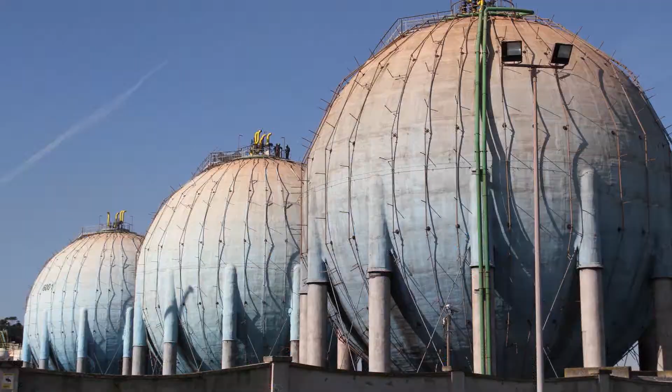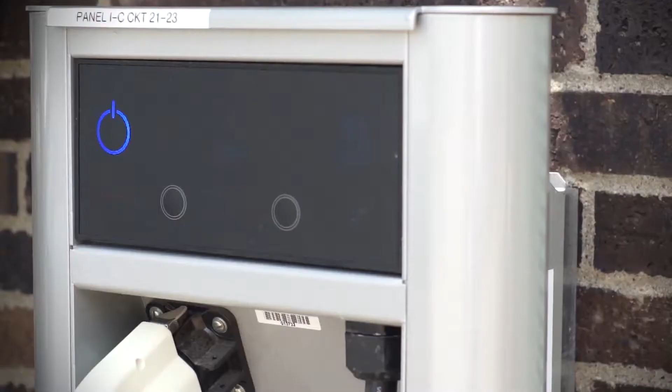It is also possible to use what the U.S. Department of Energy refers to as renewable energy sources, including solar, wind, hydroelectric, and geothermal power to generate the electricity required by EVs as these energy sources become more widely available.

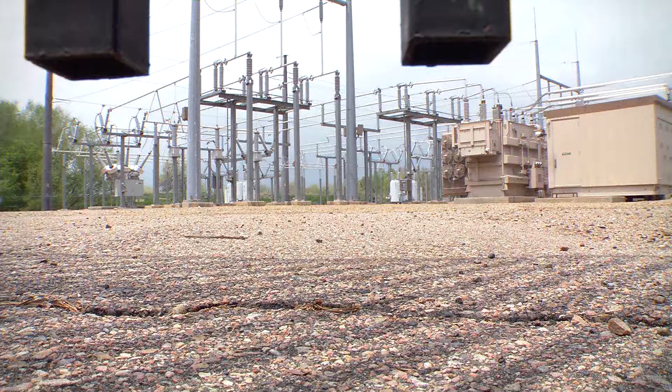Electric drive refers to vehicles that use electricity to either power or improve the efficiency of a vehicle. According to the Alternative Fuels Data Center, the electricity used to power the vehicle may be provided by the electric power grid and is stored in the vehicle's batteries. However, onboard generation of electricity is common in EVs.

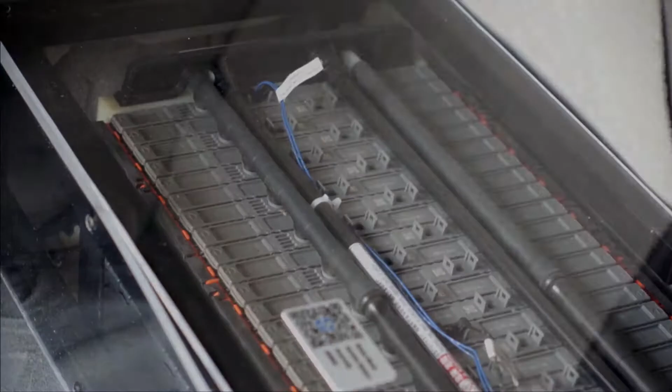Electric drive vehicles can be sorted into three categories: hybrid electric vehicles, also known as HEVs, plug-in hybrid electric vehicles, known as PHEVs, and all-electric or battery electric vehicles, also known as BEVs. An additional, less common group includes hydrogen fuel cell electric vehicles, also known as FCEVs.

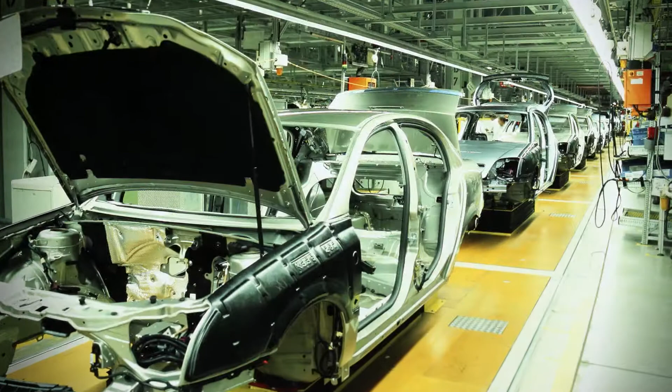All of these use electricity, energy storage devices, and electric motors to improve efficiency or completely power the vehicle. There are various configurations based on these standard categories. For example, General Motors refers to the Chevrolet Volt as an extended range electric vehicle, or EREV, which would be a variant of a PHEV.

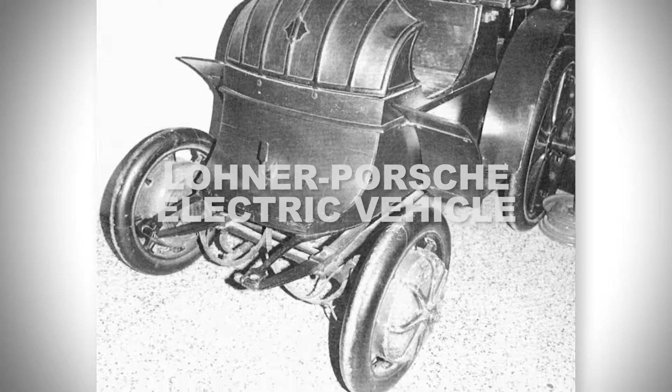Electricity as a fuel has been around for over 100 years. Some of the first electric vehicles were battery-powered versions of a horseless carriage. As petroleum production increased and fuel prices dropped at the beginning of the 20th century, electric vehicles faded away as conventional petroleum-fueled vehicles became popular.

However, with increasing fuel prices and growing environmental concerns, electric drive vehicles are again gaining popularity.

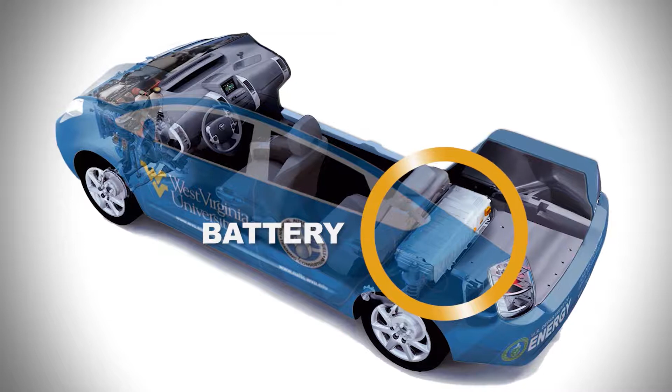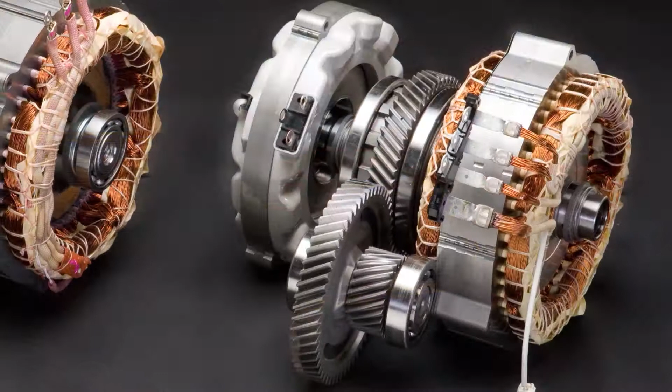The most common method to store electricity is in batteries. The most popular forms of batteries are nickel metal hydride batteries and lithium-ion or polymer batteries. The stored electricity is used to power electric motors. These motors are capable of producing large amounts of torque across a wide speed range.

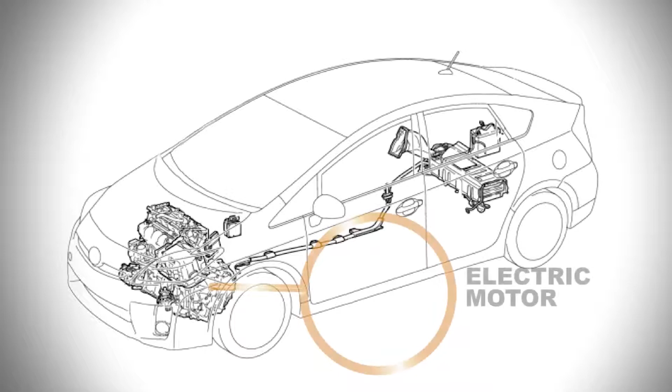HEVs and PHEVs typically use electric motors along with conventional internal combustion engines. BEVs only use electricity as a power source and do not have internal combustion engines for onboard electricity generation.

These vehicles have limited range based on electric charging station infrastructure. There are currently over 6,800 public charging stations available across the U.S.

HEVs, PHEVs, and BEVs are currently available from most manufacturers in both light-duty passenger versions as well as heavy-duty versions, such as transit buses and delivery trucks.

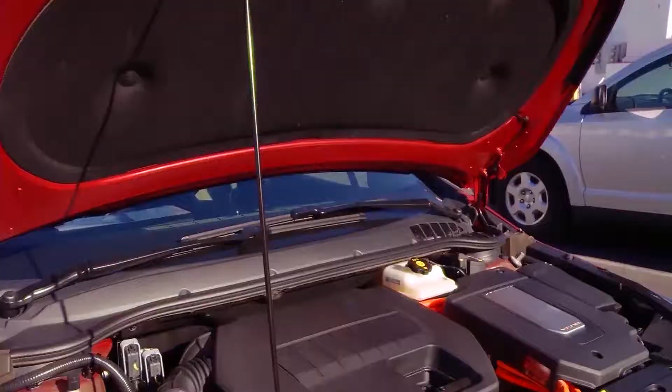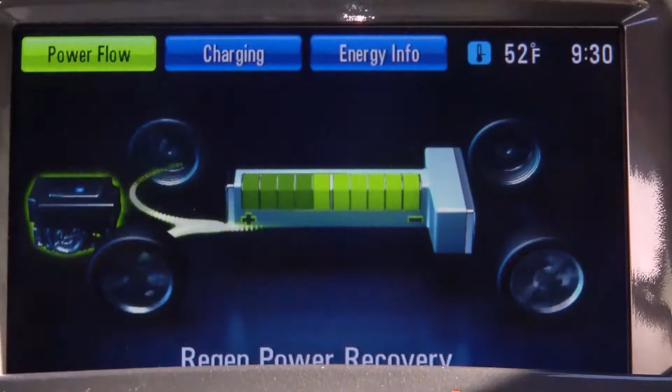HEVs use conventional fuels, such as gasoline, to generate their electric energy. They typically pair an internal combustion engine with one or two motor generators. These motor generators can assist the engine, charge onboard batteries, or capture energy that would typically be lost during braking. This technology is referred to as regenerative braking.

HEVs offer better fuel economy than conventional counterparts and lower emissions.

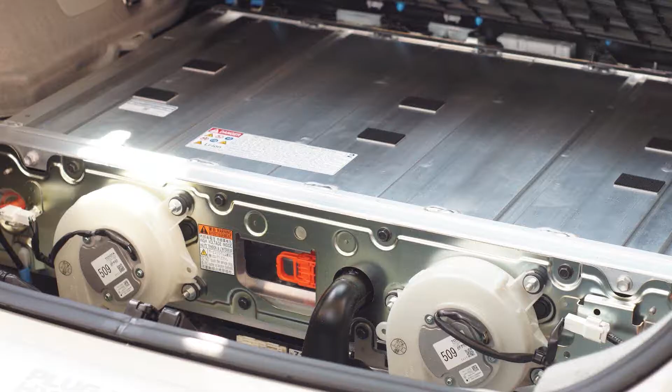PHEVs are modified HEVs in that they typically have a larger battery pack for added energy storage. They have the ability to recharge the battery using power from the electric grid. These vehicles can be charged at public charging stations or at home. They have better fuel economy when compared to HEVs because they have a longer all-electric range.

The electricity used from the grid has the added benefit of being domestically produced and, in some parts of the country, renewable.

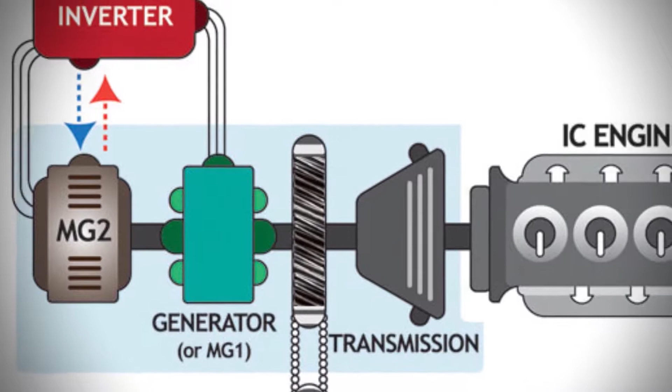HEVs and PHEVs may be further described by how the vehicle powertrains operate. These vehicles have simpler transmissions because of the added benefits of the electric motors. The main operating configurations are referred to as series and parallel.

The most common of these is parallel. A parallel hybrid can use either the internal combustion engine or electric motor for vehicle propulsion. These can be used together, separately, or in various combinations depending on conditions.

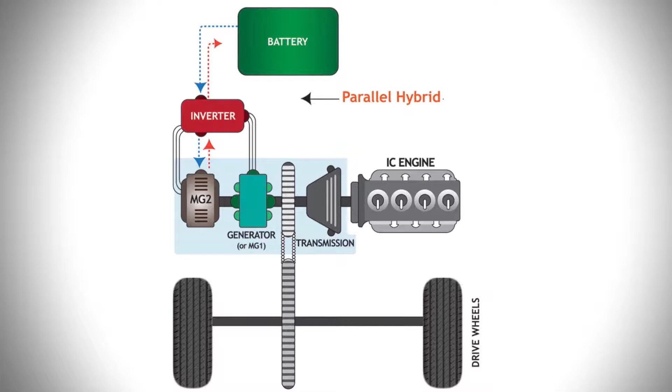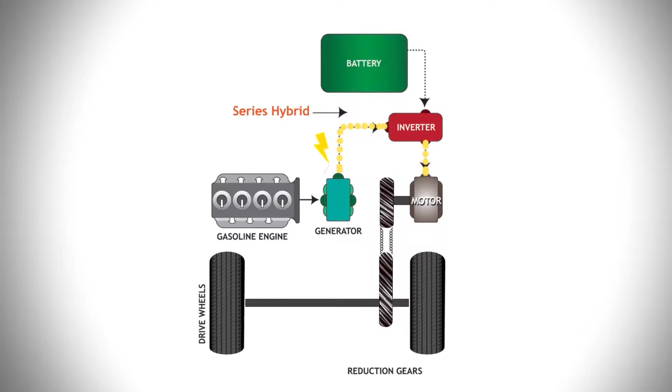Series hybrids are different in that the onboard internal combustion engine is used only to generate electricity. The electricity is then sent to the electric motors, which are the only driving force for vehicle propulsion. A common example of a parallel hybrid would be the Toyota Prius. The Chevy Volt mostly operates under a series configuration.

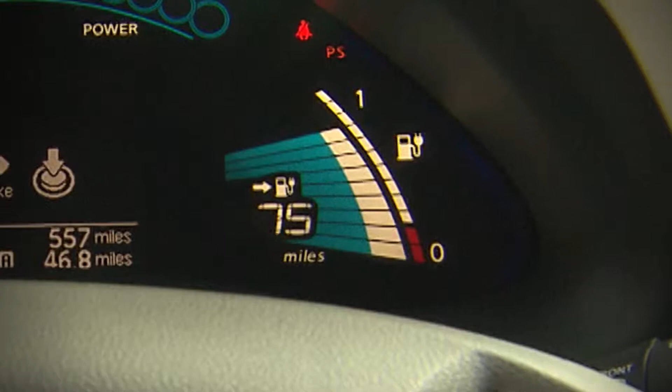The last main category of electric drive vehicles are BEVs. These vehicles operate solely on electricity and do not have onboard internal combustion engines. They are usually limited in driving range due to the current limited availability of recharging infrastructure. All of these main categories of electric drive vehicles are available in light and heavy-duty versions. Each can best serve a specific group of consumers, but all share similar advantages and benefits. The benefits of electric drive are mainly in the areas of health, environment, economy, and energy security.

Compared with vehicles fueled by conventional gasoline or diesel, EVs produce lower local emissions. When operating in all-electric modes, these vehicles produce no local emissions. This benefit is important in congested urban areas that typically have a higher number of vehicles operating in traffic, along with a higher population density. For these reasons, many consumers and transportation companies are using EVs to lower the pollution levels in these areas.

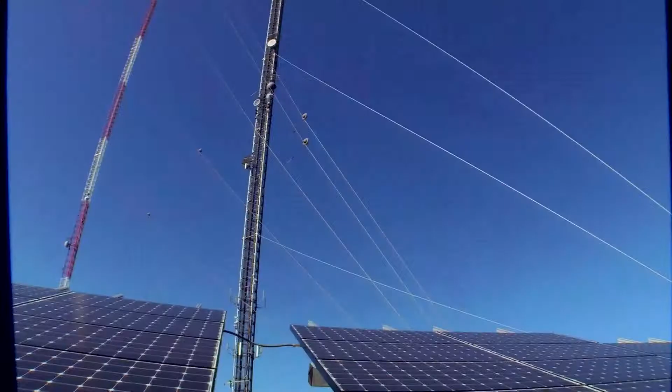Burning fossil fuels has contributed to environmental issues such as global warming, smog, and acid rain. EVs have better fuel economy than conventional vehicles, which means they are producing fewer of these detrimental emissions. The electricity used from the main power grid does usually produce emissions which must be considered when analyzing their effect on the environment. However, renewable generation of electricity is gaining popularity and contributing to the power used for recharging. When BEVs are recharged using solar or wind-generated power, they have no local or global emissions. This means that some BEVs can have nearly no carbon footprint, meaning less pollution for a better environment.

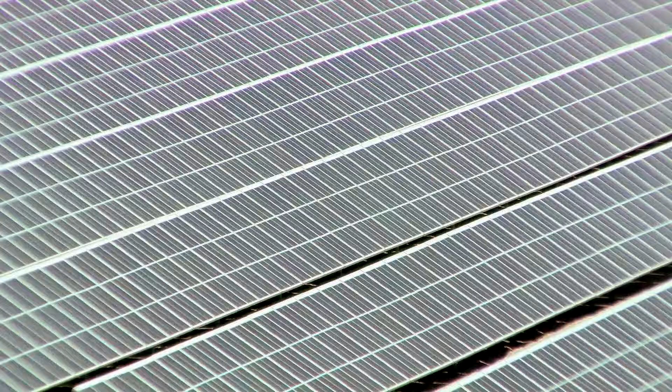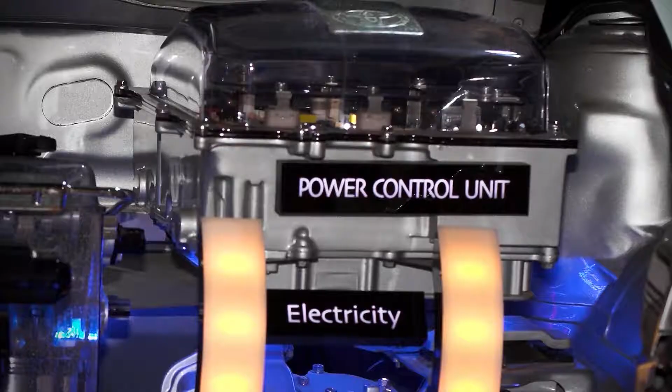The electricity used by EVs for recharging from the electric grid is also produced domestically. Natural gas, coal, and renewable electricity are all produced in the U.S. Not only can these vehicles operate cleaner and more efficiently, but they can do so on American energy. In addition to assisting the country's economy, EVs are usually less expensive to maintain and operate.

Due to the improved fuel economy alone, HEVs are less expensive to operate compared to conventional vehicles, usually having fuel costs of 5 to 7 cents per mile compared to conventional vehicles that cost 10 to 15 cents per mile. PHEVs also are said to be less expensive to operate than HEVs, usually costing 2 to 4 cents per mile based on average U.S. electricity rates.

A recent study estimates that if 73% of U.S. vehicles were powered by electricity, the nation could offset around 6.2 million barrels of oil per day, therefore reducing our dependency on foreign oil. Since electricity is domestically produced, electric drive vehicles can create and secure American jobs and infrastructure.

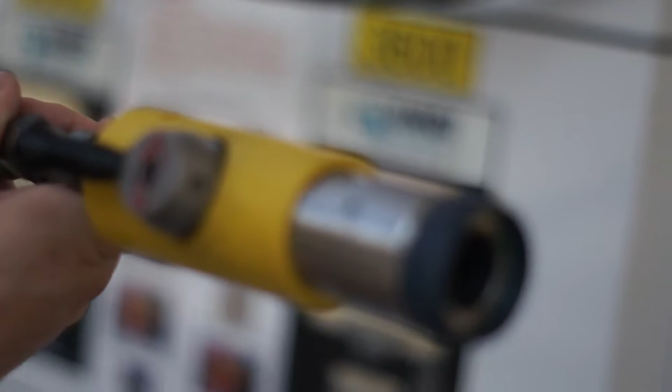There are many reasons to consider the use of natural gas as a transportation fuel. One of the primary advantages in using natural gas vehicles is that they produce fewer emissions than conventional gasoline vehicles. Because of this, natural gas buses are widely used in municipal and private fleets, especially in areas where central fueling stations are readily available. Also, 87% of natural gas is domestically produced in the U.S.

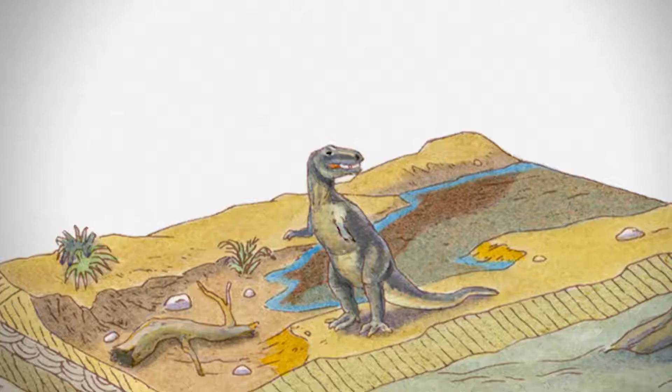Natural gas is the product of organic matter that has decomposed in the absence of oxygen. Biological matter that died millions of years ago became trapped beneath layers of ice, sand, and silt. As more layers were added, along with intense geothermal heat and pressure, natural gas was formed.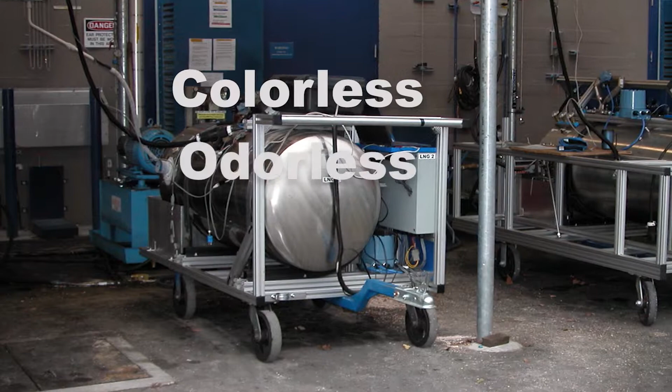Natural gas is odorless, tasteless, and non-toxic. It is colorless and may not be visibly detected unless ignited. However, once ignited, it will burn with a pale blue flame that is nearly invisible in daylight.

Like coal and oil, natural gas is a fossil fuel. Unlike other fossil fuels, natural gas is a clean-burning fuel and emits lower levels of harmful byproducts into the air. Natural gas is typically found in coal beds and oil fields, but can also occur naturally on its own.

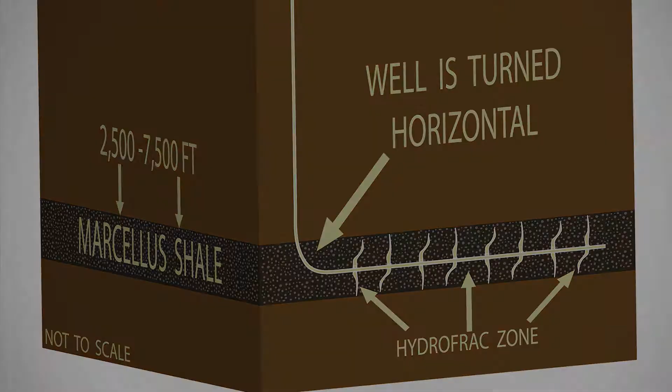Natural gas has been used as a cooking and heating fuel for centuries. However, many people do not realize that it is also a viable domestic vehicle fuel.

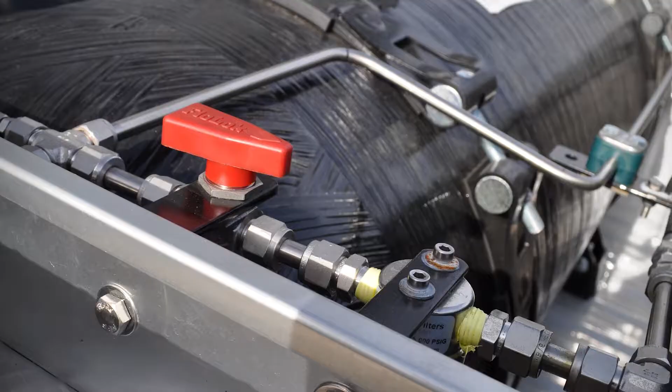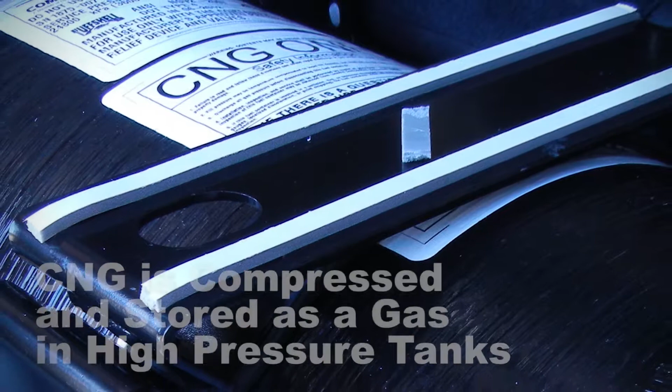There are two forms in which natural gas is used as a fuel for vehicles: compressed natural gas, known as CNG, and liquefied natural gas, referred to as LNG. CNG is compressed and stored as a gas in high-pressure tanks, which makes it a stable method of storage for containing natural gas over long periods of time.

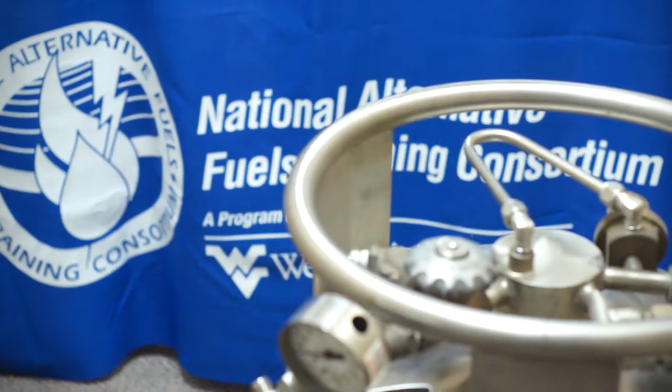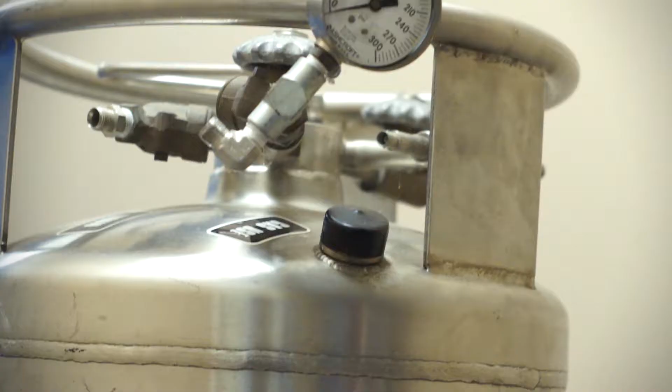According to the Natural Gas Vehicle Coalition, there are about 112,000 natural gas vehicles on U.S. roads today and more than 13 million worldwide.

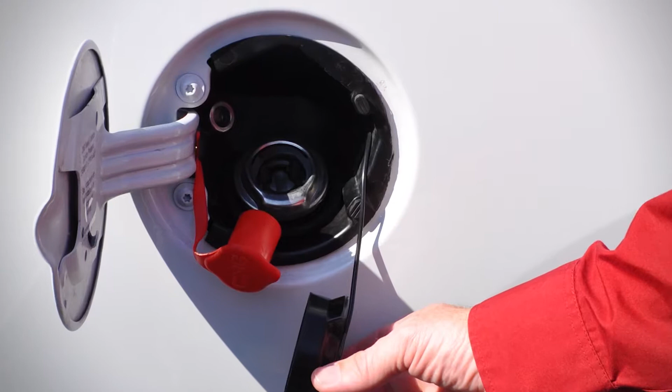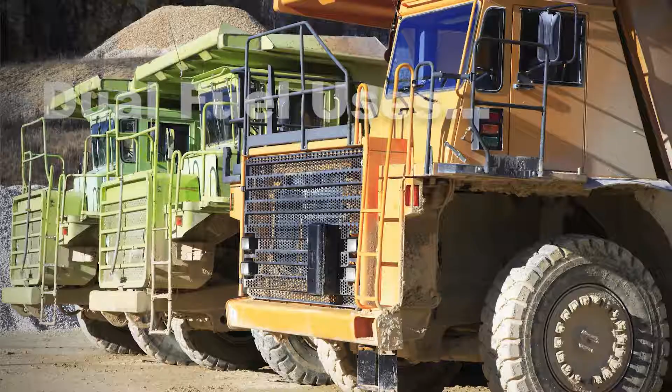There are three types of natural gas vehicles: dedicated, bi-fuel, and dual fuel. Dedicated vehicles operate only on natural gas. Bi-fuel vehicles are designed with two separate fueling systems that allow them to operate on natural gas as well as conventional gasoline. Dual fuel vehicles are more common in the heavy-duty market. These engines use natural gas as the main fuel and up to 10% diesel for ignition.

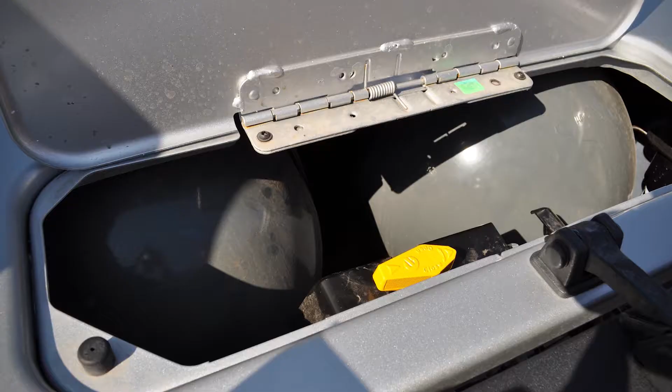Many conventional vehicles may be legally converted to operate on natural gas instead of gasoline using EPA-approved conversion kits. Because of the differences in fuel storage from conventional vehicles, natural gas vehicles must have specialized tanks for storing fuel.

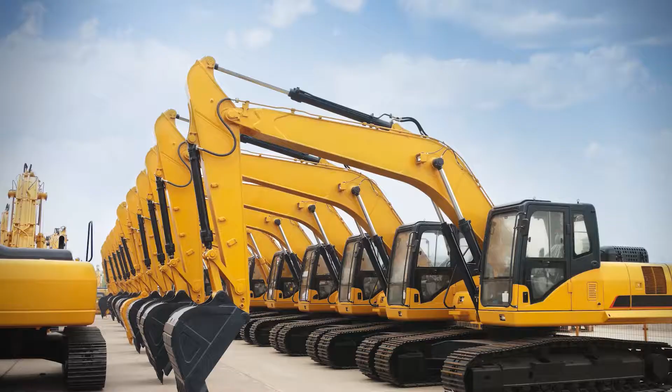Many of the natural gas vehicles on the roads today are found in large fleets, such as taxicabs, transit and school buses, airport shuttles, construction vehicles, garbage trucks, and public works vehicles, since these types of vehicles tend to have space and energy requirements that adequately accommodate the added tanks and LNG equipment.

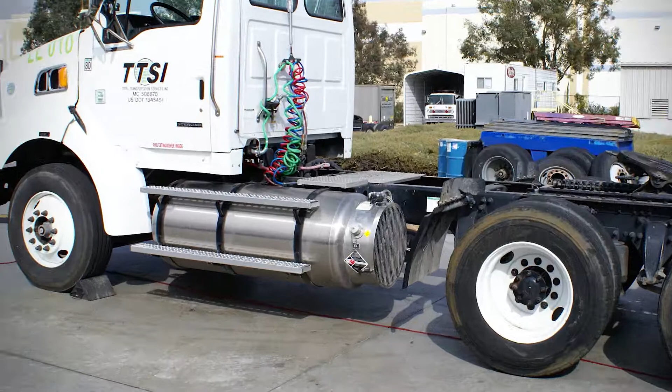The majority of natural gas passenger vehicles operate on CNG. Presently, there are no light-duty passenger vehicles available that operate on LNG, which is more popular for heavy-duty fleets.

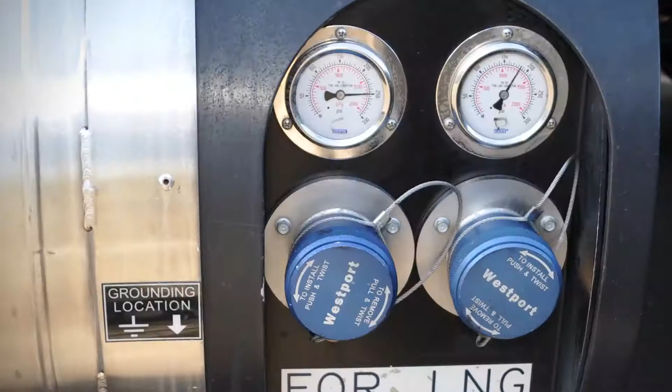There are also other benefits in expanding the use of natural gas to fuel vehicles: for the betterment of human health and the environment, the economy, national energy security, and to help reduce the dependence on foreign oil.

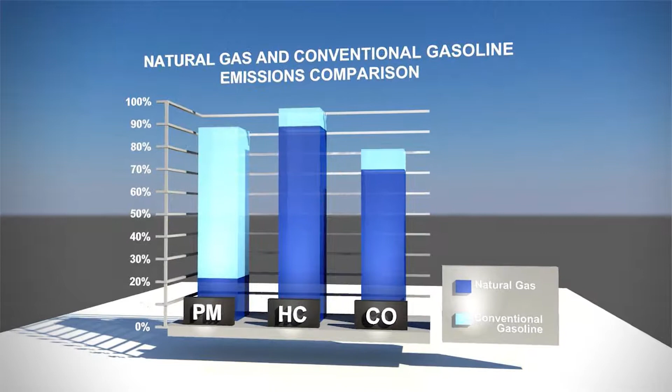Compared with vehicles fueled by conventional gasoline or diesel, natural gas vehicles can produce significantly lower amounts of harmful emissions such as particulate matter, carbon monoxide, and greenhouse gases. These emissions have been linked to the formation of smog, which can create or irritate existing cases of asthma, emphysema, and bronchitis.

Burning fossil fuels has contributed to environmental issues such as global warming, smog, and acid rain.

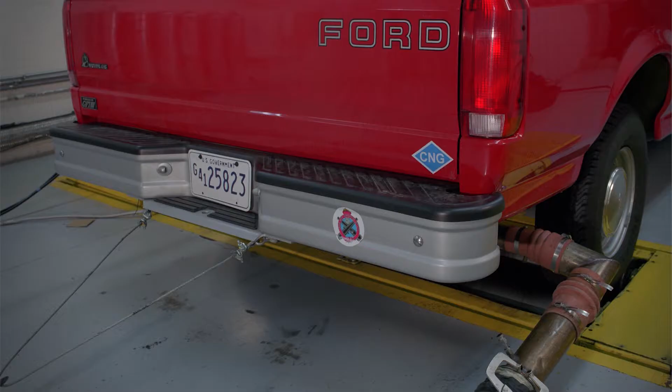When compared with conventional diesel vehicles, natural gas vehicles may emit significantly fewer emissions of carbon monoxide, oxides of nitrogen, and hydrocarbons. The use of natural gas as a vehicle fuel can also reduce carbon dioxide emissions by up to 25% when compared to diesel exhaust, which in turn will decrease the effects humanity has on global warming. Natural gas, however, is the cleanest of all hydrocarbon fuels and therefore offers substantial environmental benefits.

Most of the natural gas used in the U.S. is produced domestically. In most places where CNG is sold as a vehicle fuel, it costs less than gasoline. In the U.S., natural gas is typically at least $1 less per gasoline gallon equivalent when compared to conventional gasoline.

With a network of pipelines in place and the ability to use the existing distribution network, there are minimal additional costs to expand the use of natural gas in transportation. This helps lessen the financial burden many states may face in building the necessary fueling infrastructure.

Natural gas is much less utilized than other hydrocarbon fuels, making it significantly cheaper than coal or oil. The use of natural gas as a transportation fuel could alleviate some of the nation's dependence upon foreign oil and encourage energy independence.

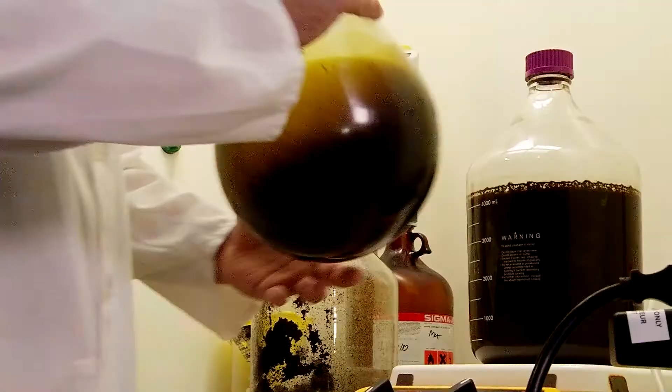Harvesting methane from biogas produced from landfills, dairy waste, algae, and agricultural organic matter is currently being performed in several locations across the country.

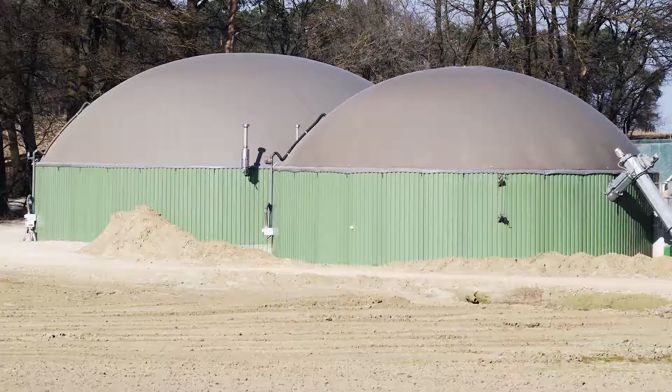There are more than 500 landfills in the U.S. that are currently using biogas as an energy source for electricity production, for use in boilers and furnaces, or for a vehicle fuel. Developments in natural gas production from waste materials help produce energy as well as nitrogen-rich fertilizer, creating use from previously wasted material.

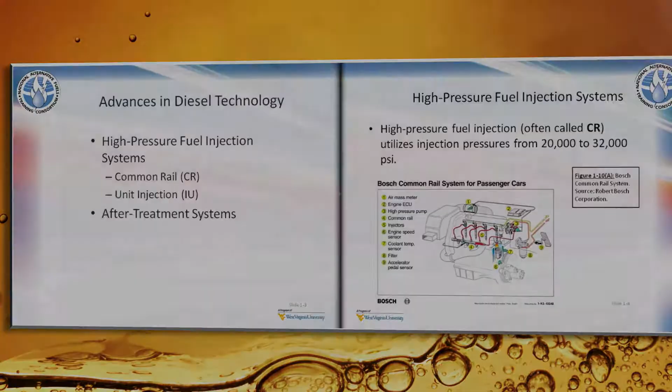There are many reasons to consider the use of biodiesel. Overall, combining biodiesel with diesel produces a cleaner burning fuel.

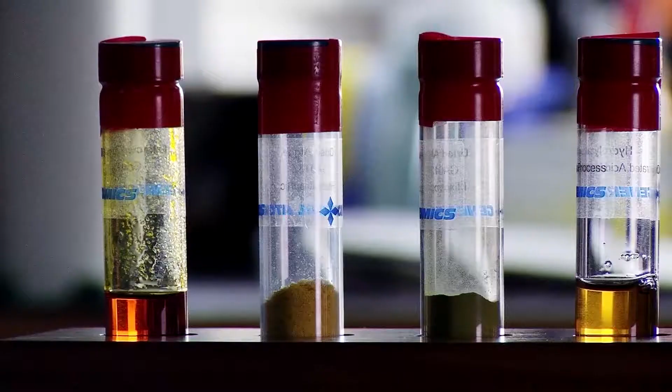Since biodiesel can be made from new or waste vegetable oil, algae, fish oil, or plant and animal matter, it promotes growth of the U.S. agricultural sector. The reduced emissions of diesel-powered school buses alone can contribute significantly to the health of children in this country. Biodiesel is a non-toxic, domestically produced, renewable fuel manufactured from organic materials such as soybean oil, new and used vegetable oils, animal fat, algae, and recycled organic waste.

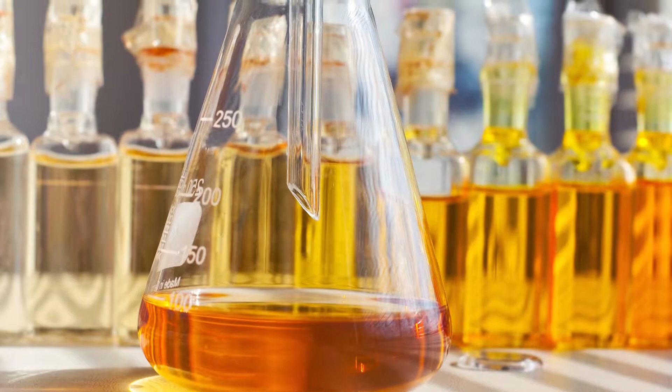Biodiesel is used as a vehicle fuel in blends and used in many different concentrations. Biodiesel must meet the requirements of the American Society for Testing and Materials Standard D6751. The most common blend of biodiesel used in the United States is B20, 20% biodiesel, 80% diesel. Pure biodiesel is B100. Other blends include B2 and B5. In 2010, more than 315 million gallons of biodiesel were produced in the U.S.

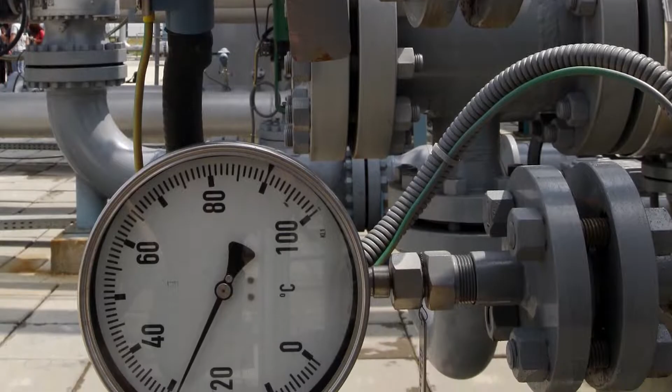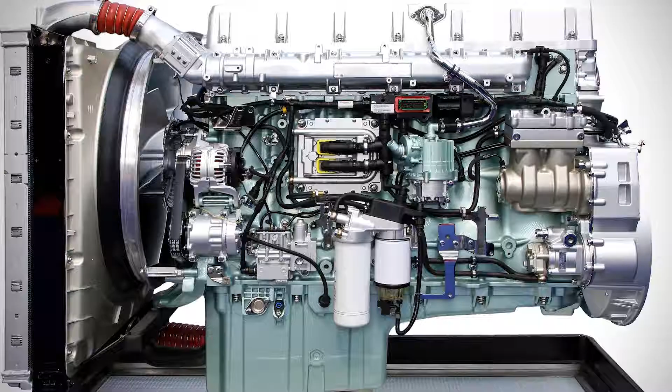Biodiesel can be used in most diesel engines, especially newer ones, model years 1994 and newer. Most manufacturers warrant the use of blends up to B20 in their diesel engines. Biodiesel blends are used in heavy-duty vehicles as well as in public transit, school buses, tractor-trailers, SUVs, and farm equipment. There are also other benefits in expanding the use of biodiesel to fuel vehicles, for the betterment of human health and the environment, economy, national energy security, and to help reduce the dependence on foreign oil.

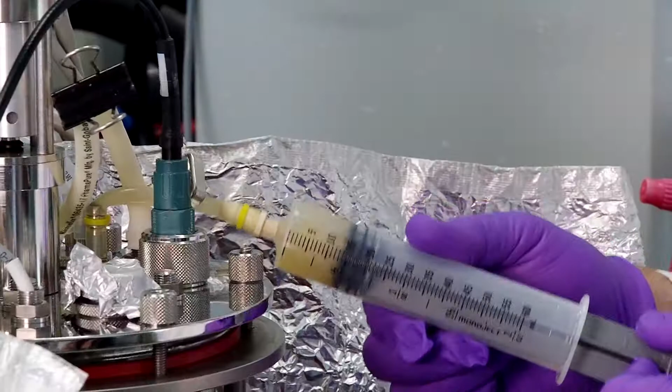Independent tests have demonstrated that biodiesel significantly reduces virtually all regulated emissions while showing that biodiesel poses no threat to health. In 2000, biodiesel became the only alternative fuel in the country to have successfully completed the EPA-required Tier 1 and Tier 2 health effects testing under the Clean Air Act. These independent tests conclusively demonstrated biodiesel's significant reduction of virtually all regulated emissions, helping to improve overall air quality that impacts human health.

Pure biodiesel is non-toxic, biodegradable, and can result in substantial reduction of carbon monoxide, unburned hydrocarbons, and particulate matter, all of which contribute to a cleaner and healthier environment. Plants remove carbon from the atmosphere. Since biodiesel can be made from plant materials, burning biodiesel does not add carbon to the atmosphere. In fact, using biodiesel only puts back into the atmosphere the amount of carbon that the crops took out. Therefore, it is considered carbon neutral.

The biodiesel industry has the potential to significantly contribute to the overall U.S. domestic economy. The National Biodiesel Board has released a study on the U.S. biodiesel industry's economic impact on job creation and household income generation. The domestic biodiesel industry is expected to create 74,000 jobs by 2015, while increasing household income by an estimated $4 billion. In addition, the report projects that the biodiesel industry will generate nearly $7.3 billion in GDP.

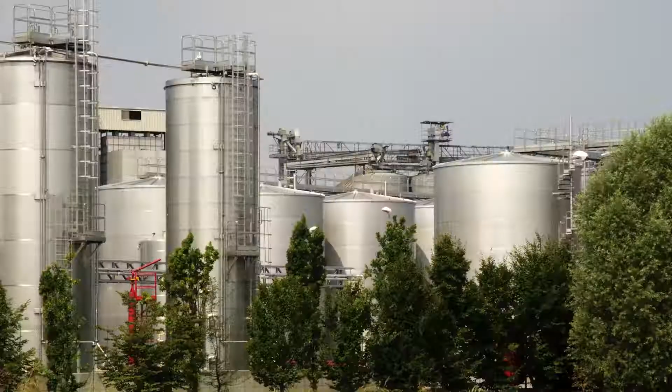The United States is one of the greatest exporters of agricultural products in the world. Because biodiesel can be manufactured using existing industrial production capacity and used with conventional equipment, it provides substantial opportunity for immediately addressing the nation's energy and security issues. Taking advantage of American feedstock production, the biodiesel industry can provide a solution to foreign oil dependency.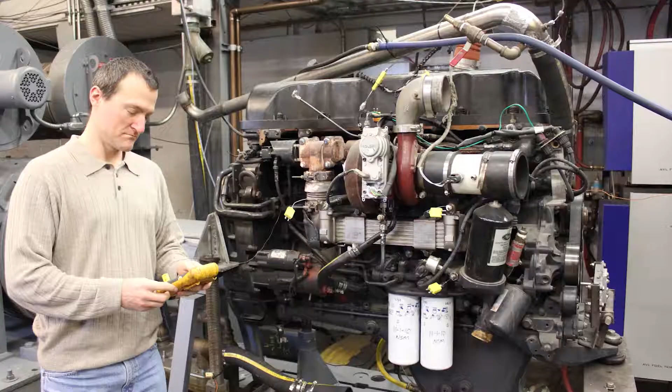The renewability of a fuel is often referenced by the energy balance, or the ratio of how much energy is required to produce and distribute the fuel compared to the amount of energy the fuel releases when it is burned. A higher energy balance ratio indicates a lower environmental impact because less fossil energy is needed to produce, refine, and distribute the fuel. Biodiesel has a very high energy balance compared to other alternative fuels.

Published research from the University of Idaho and U.S. Department of Agriculture shows that for every unit of fossil energy needed to produce biodiesel, the return is 3.2 units of renewable energy. For comparison, conventional diesel fuel delivers only 0.83 units of energy for every unit of fossil fuel energy used to produce it.